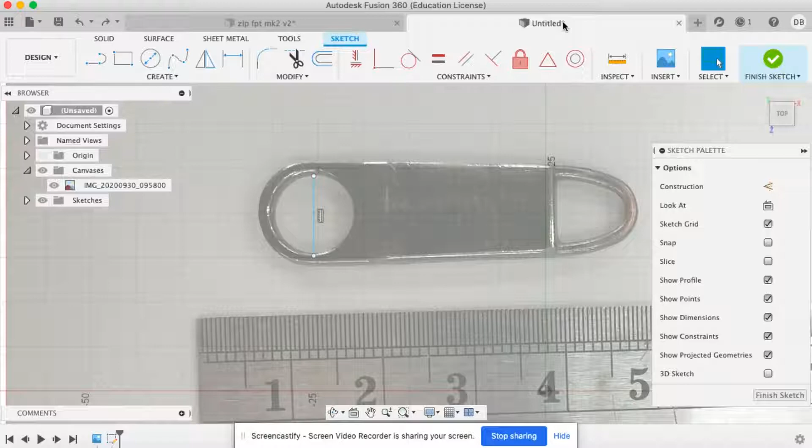The first job, get rid of this line here. Just click on it and press delete. Next, we're going to want to start by making the circle in the middle of the zip.

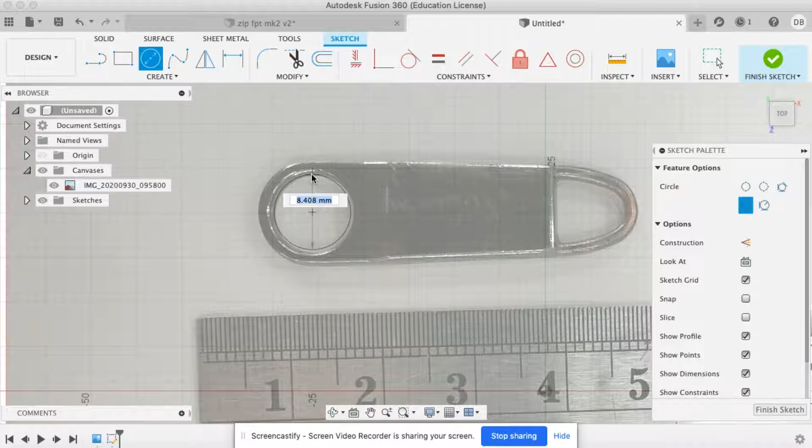Now, there's no easy way to find the middle, but the best bet is to just draw it roughly. Drag this out. As I said before, I know that this hole is 8.5, but I don't want to make it fit exactly. I want this to be smaller. So I'm actually going to make this 7.5 mil.

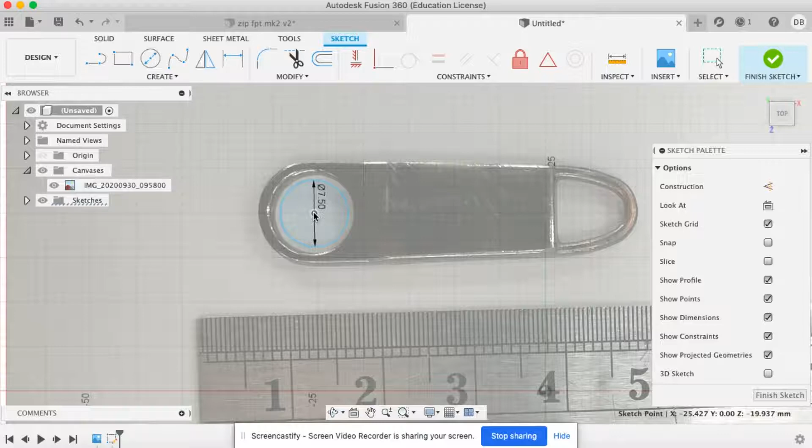With that drawn, I can then click on this circle in the middle and drag this and try to get it as close by eye as being in the middle of that circle. As long as we've got it pretty close, it should be good enough. Remembering that we're talking about this being 1 millimeter here, so a slight movement up or down is 1/10 of a millimeter, which is very, very small.

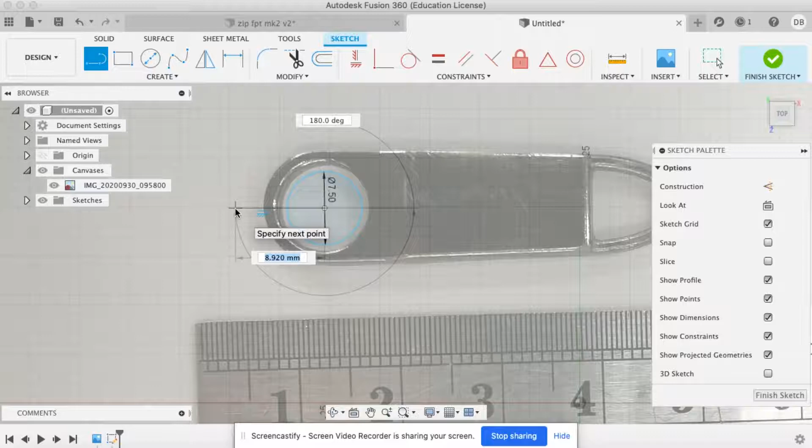Next, I'm going to use the line tool. I'm going to move out this way and go 9 millimeters. I'm then going to use the rectangle tool and draw a rectangle down here.

Now I could just click randomly and try to get this as close as I can, but I like putting in specific dimensions. Remember, we don't want this right on the edge of the zip, we want a bit of room. So I'm going to go for 6.5 millimeters here, and 17 millimeters here.

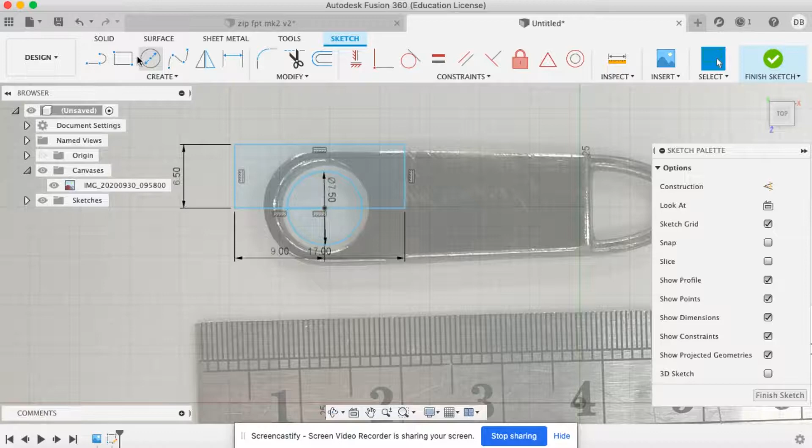I'm going to repeat that, but underneath. So I'm going to click on this point here again, drag down, 6.5 millimeters, press the tab key, and then type in 17.

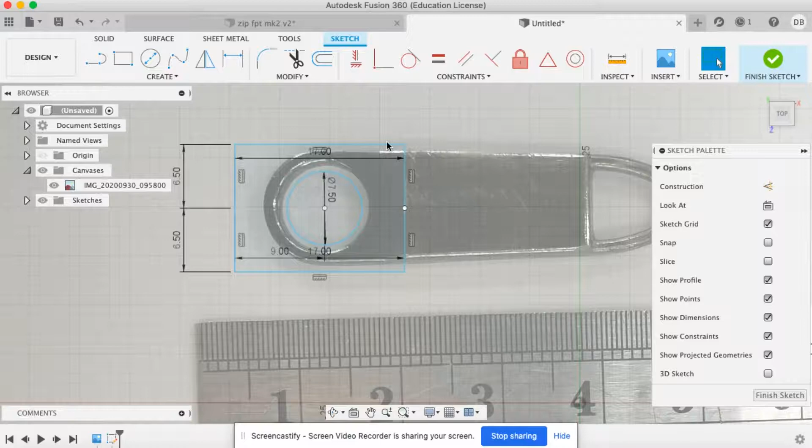I'm now going to get rid of these lines running through the middle because I no longer need these. And I've got a square box with my circle in the middle.

Next, I'm going to use the offset tool, which is up here. Click on the outside of this, and I'm going to offset this by 2 mil. Press return. I'm then going to offset it again and use the same one.

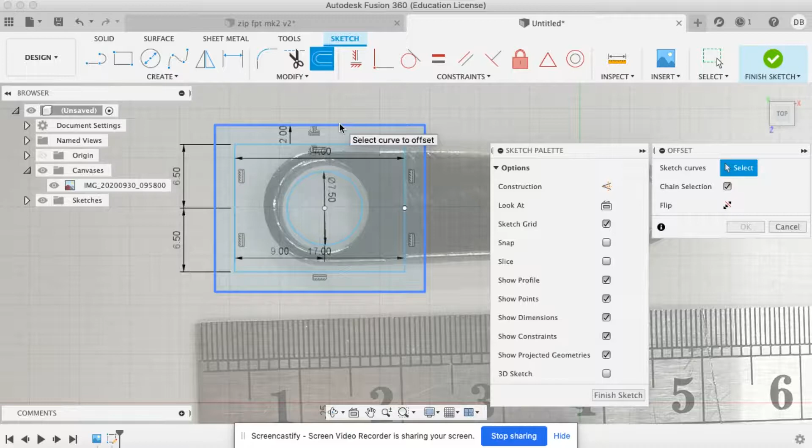Now, you might want to press on this one, but it won't let you offset and offset. So I have to find the original. I've got to go back to the original and this time go 4 mil and press enter.

Next, I'm going to extend this line here with the line tool to cross over both of these and click and snap onto there. And then again from here and across to there.

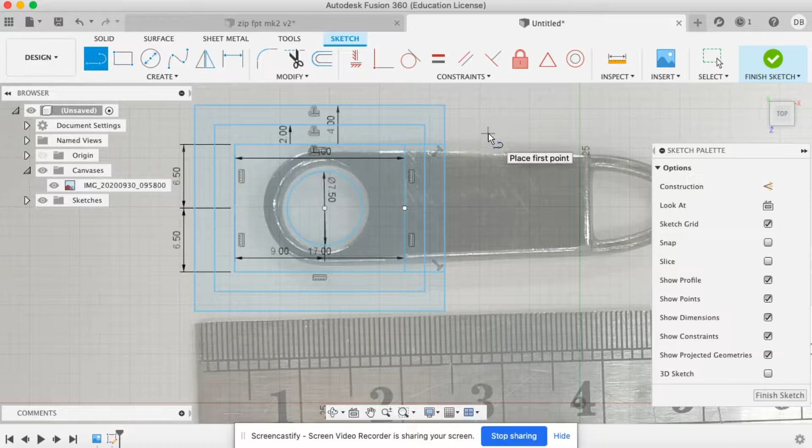Now you notice in my drawing I don't have this line here. So at this point I can simply click on that line and press the delete button and get rid of it as I don't need it anymore.

You'll also notice that on my drawing I've got a semicircle here. In order to insert the same semicircle, I'm going to use the circle tool. I'm going to go from my center point and go to the edge of my line here.

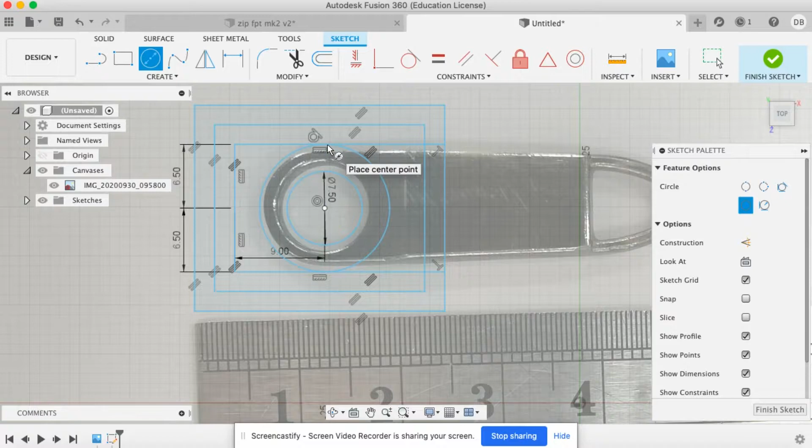Then I'm going to use the trim tool to just trim off this bit, this bit, this bit, and this bit. I press the T button on the keyboard to use the trim tool, or I select this tool here. You can also see it's just there.

Now we've got pretty much the same as what I've got in my original drawing. I'll see you in the next video.